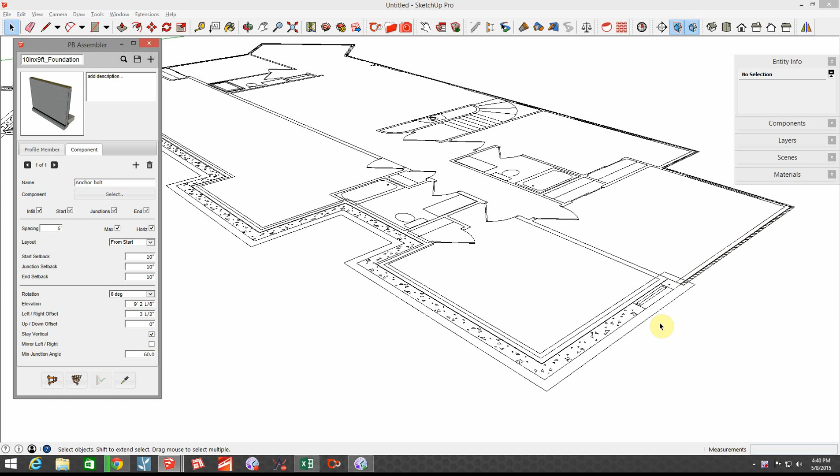In this example, I'm going to show you a foundation wall that I created that saved me a ton of time in my workflow using Profile Builder 2 and the Assembler. So in this case, I've got an imported DWG of a foundation for a house I'm building, and I want to make it come to life with a 3D model.

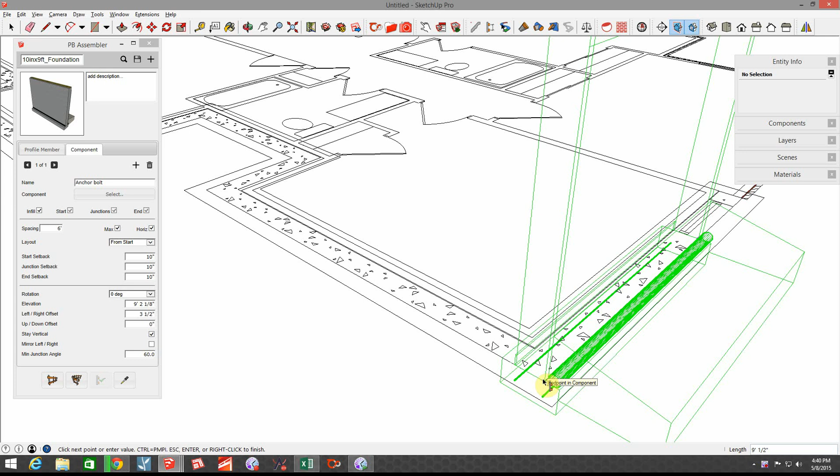So I've created this assembly that has a whole bunch of stuff in it. I'll just start drawing the assembly. I'm just going to start on my foundation, and you can see as it's building I've got a lot of things going on in there. I've got rebar, footing, foundation, an expansion joint, drain tile, gravel, all kinds of stuff. So I'm going to click on that and you'll start seeing it come to shape.

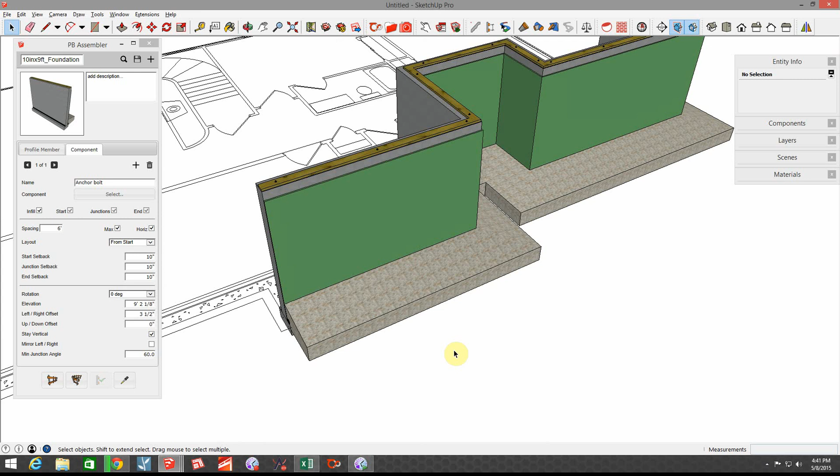And you can literally just go right around your drawing and just snap to your points in your drawing. Alright, I'll get out here to a point and stop, but it's so much fun I want to keep going. Alright, so here I am. Boom. Now you'll see that I've got quite a bit of things going on here. I've got a 10 by 20 footing. I've got rebar in it, 2 runs of rebar.

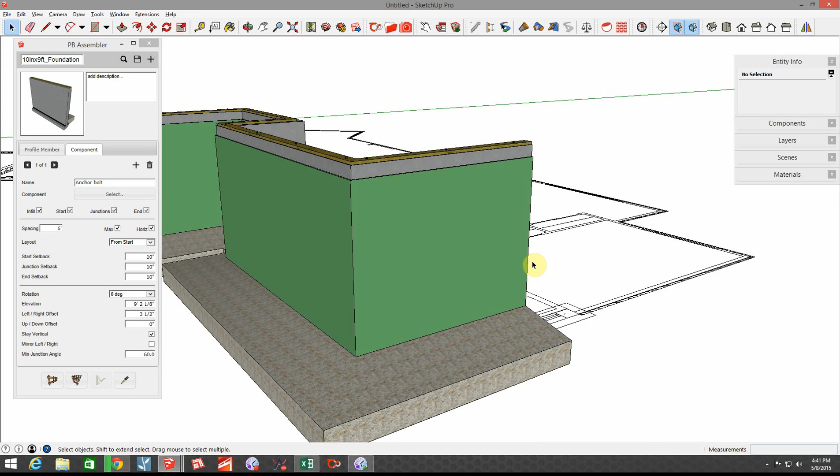I've got a 10-inch by 9-foot tall foundation wall with 4-inch expansion joint on the inside for my slab. I've got spray-applied waterproofing on here, and then we put the foam board on there, which I will later cut to fit grade so I can get my area of waterproofing for my budget. I've got drain tile, and I've got the gravel filter that goes around the drain tile, so I can get an estimate of the cubic yardage of stone I need.

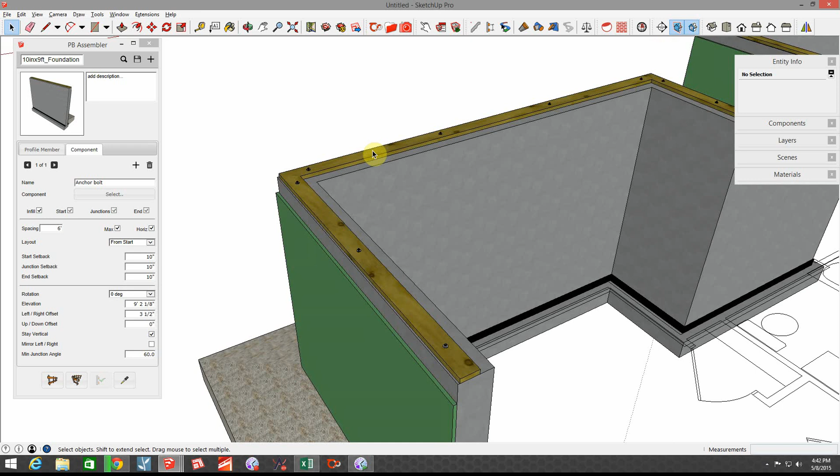And I've got a 2x6 sill plate on here that's a 1/2 inch back for my sheathing to come down and tie to the sill plate, and anchor bolts that are within a foot from the ends, and then every 6 feet thereafter per code. So this does it for me instead of me having to do it by myself. That one swift action created all these things all in one to bring this thing to life.

So if you look over in the PB assembler, you get your foundation wall, which was a profile that I created and put in my foundation library, which is essentially just a 10-inch wide, 9-foot tall foundation wall. The next thing I have is a 10 by 20 footing, and I put its origin to be 5 inches in so that it's sitting on this 10 by 20 footing, so it stacks, and you can see how it is graphically in the interface box there.

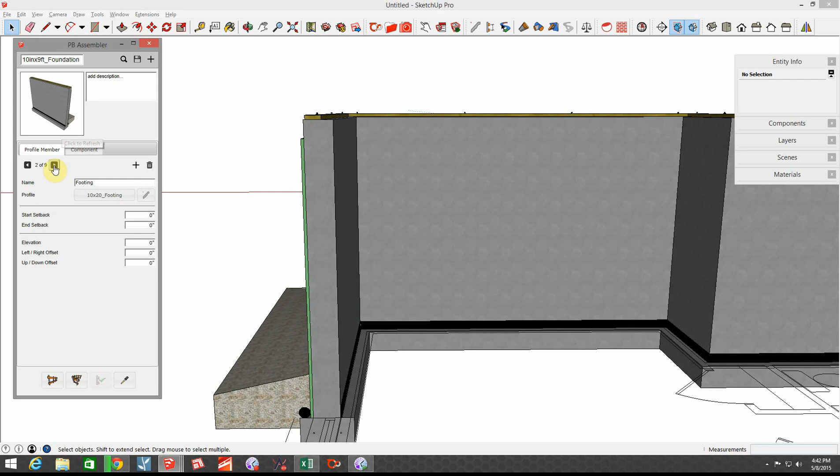Waterproofing, I just put this insulation board on the outside here, and its origin was to the other side of the insulation board, so it's stacked. I've got this sill plate, and you can see over in here that its elevation is 9 feet up because it's a 9-foot wall, and its left-right offset is a 1/2 inch. So I set it back to allow room for the sheathing. Very simple. And again, this is a 2x6 out of my lumber library that I created.

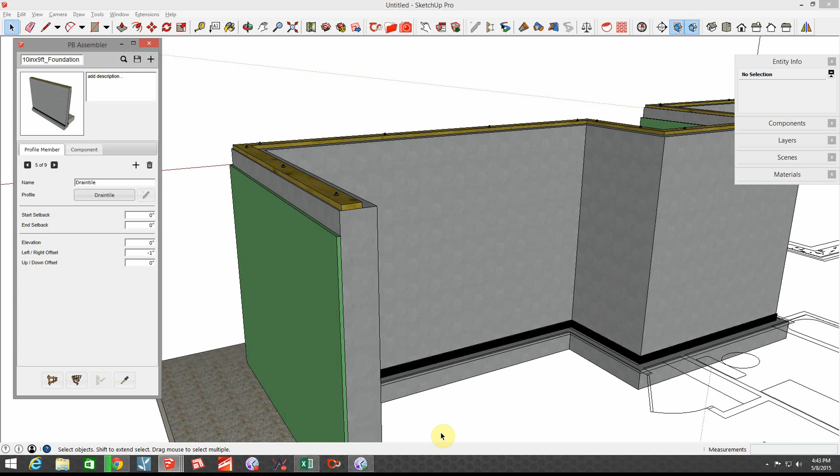It's probably already something that comes loaded on Profile Builder, but I created my own library of standard profiles with their textures already pre-applied, which is an awesome feature that Dale gave us. You can actually pre-select the texture as well as the layer that you want these things to be on, which saves a ton of time. I've got my drain tile, and it's an inch off of this corner because of the waterproofing. I have my gravel filter and its parameters to get it stacked right.

I've got one run of rebar here that's 6 inches down into this footing, and one that's here that's 10 inches offset left and right and 6 inches down. And then finally I have this expansion joint that is set 10 inches over from the origin, since I was tracing it from the outside of the foundation wall. So this is a 1/2 inch strip of expansion joint for my concrete.

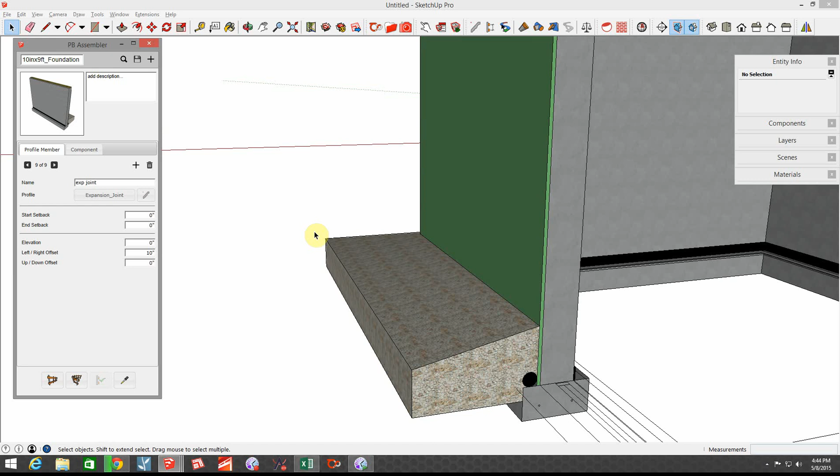So then you go to components. The only component I have in here are these anchor bolts, and I told it to be within 10 inches of the end and every 6 feet thereafter, but you get the idea. So anyways, that's a quick tutorial on how to use the assembler for a foundation wall.